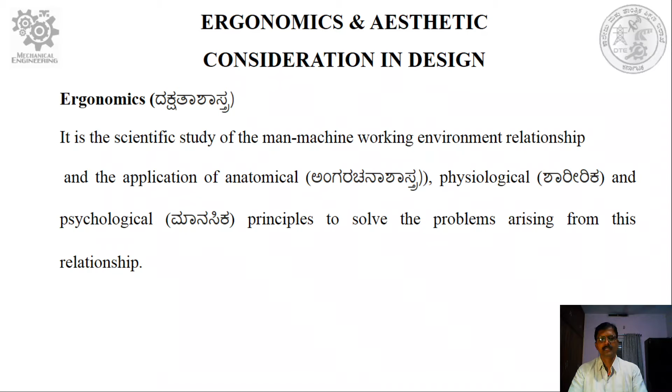Ergonomics. It is the scientific study of the man-machine-working environment relationship and the application of anatomical, physiological and psychological principles to solve the problems arising from this relationship. Aesthetic. A set of principles of appreciation of beauty. It deals with the appearance of the product at any stage in the product life. The aesthetic quality cannot be separated from the product.

Sometimes aesthetics is also called the judgment of sentiment and taste. Aesthetics examines our affective domain response to an object or phenomenon. Aesthetic judgments might be seen to be based on the senses, emotions, opinions, will, desire, culture, values, preferences, etc.

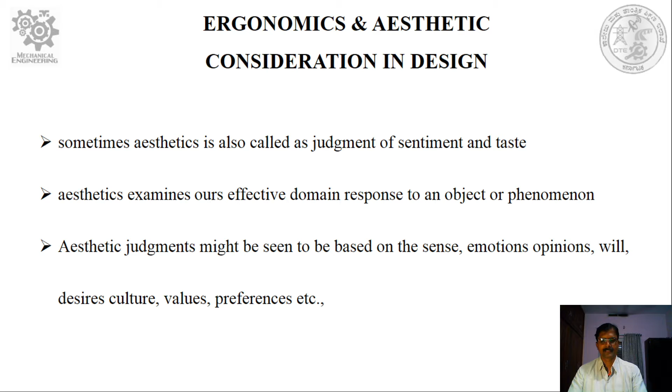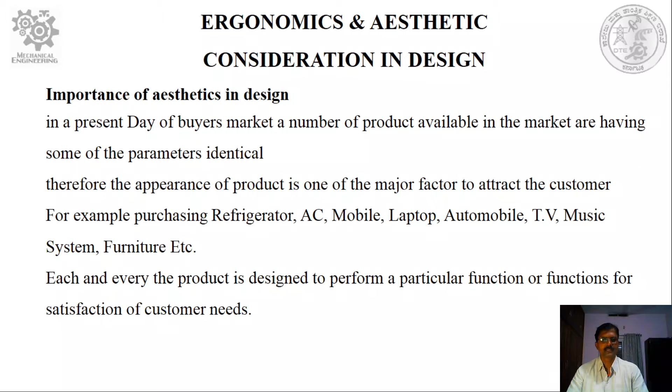Importance of aesthetics in design. In the present day buyers' market, a number of products available in the market have some of the parameters identical. Therefore, the appearance of the product is one of the major factors to attract the customer. For example, purchasing a refrigerator, AC, mobile, laptop, automobile, vehicles such as TVS, two-wheeler, four-wheeler, etc., TV, music system, furniture, etc. Each and every product is designed to perform a particular function or functions for satisfaction of customer needs.

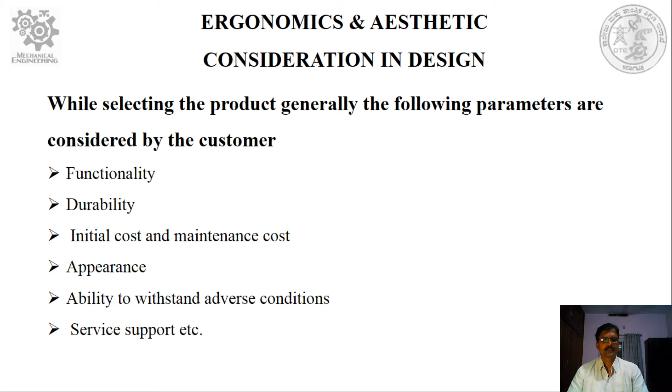While selecting the product, generally the following parameters are considered by the customer. First of all, functionality, durability, initial cost and maintenance cost, appearance, ability to withstand adverse conditions, service support, etc. Aesthetic considerations in design. The aesthetic considerations in design are as follows: step, taper, shear, streamline and sculpture. Let us see one by one.

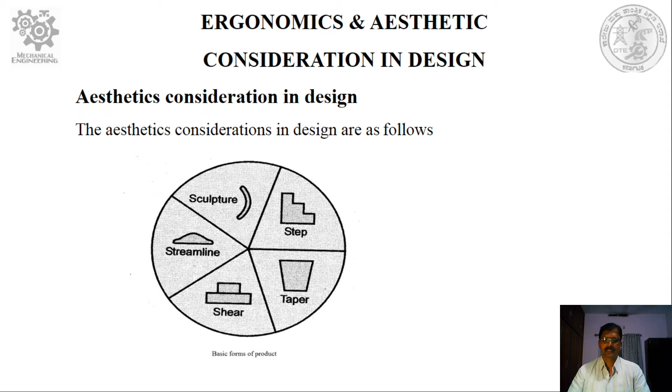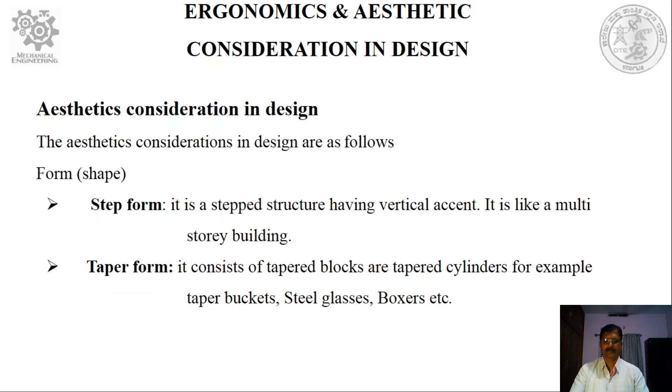Aesthetic considerations in design are as follows. Form or shape. Step form: it is a stepped structure having vertical accent. It is like a multi-story building. Taper form: it consists of tapered blocks or tapered cylinders, for example, taper buckets, steel glasses, boxes, etc. Shear form has a square outlook, for example, cartons, boxes, etc. Streamline form: it has a streamlined shape seen in modern cars, aeroplanes, etc. Sculpture form: it consists of ellipsoids, paraboloids and hyperboloids.

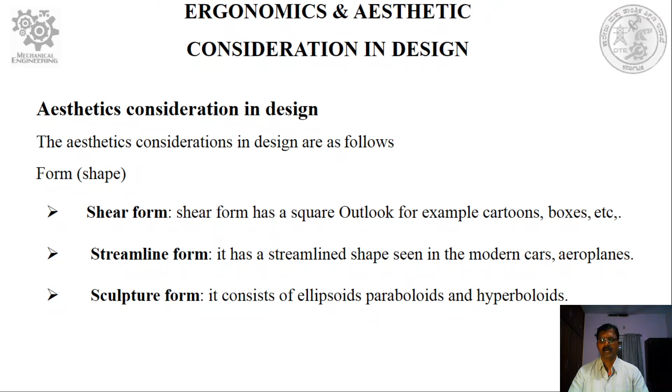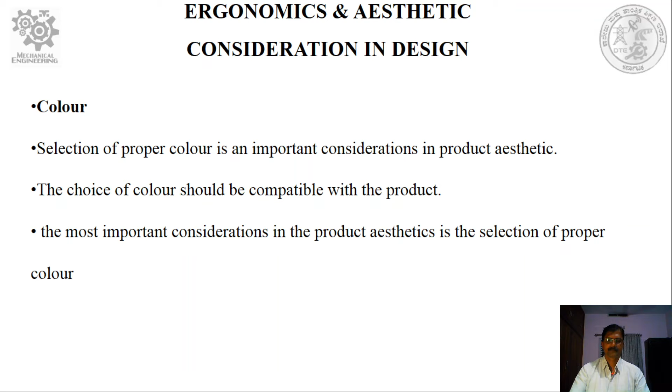Color. Selection of proper color is an important consideration in product aesthetics. The choice of color should be compatible with the product. The most important consideration in product aesthetics is the selection of proper color. The color choice should be compatible with the conventional ideas of the operator. Various colors are associated with different moods and conditions. For example, the selection of the color code should be compatible with the conventions.

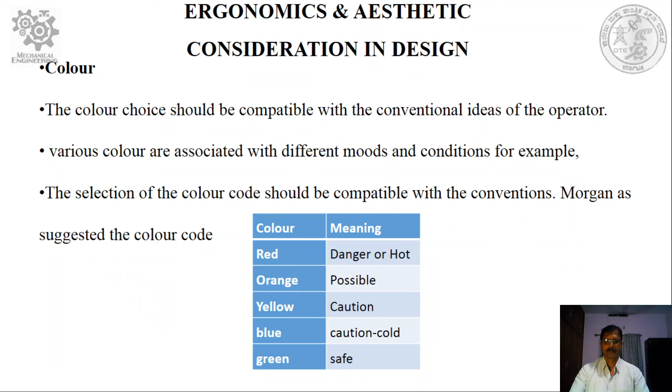Symmetry. The human eyes are conditioned to see things in symmetrical form and tend to reject asymmetrical shapes. Hence, in many products, symmetry about at least any one axis gives aesthetic appeal to the product. In some cases, functional requirement demands asymmetry. In that situation, balance in the product improves aesthetic feeling.

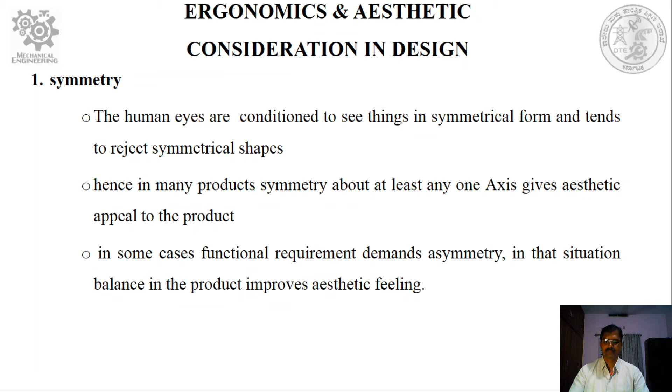Surface finish. The surface finish enhances the appearance of the product. The surface finish selected may be shiny, lustrous, or matte depending upon the requirement. Along with these parameters, external appearance is the cumulative effect of rigidity, resilience, motion of the elements, materials, manufacturing methods used, surface treatments used, etc. The industrial designer should consider all the above factors to meet the visual requirements of the product.

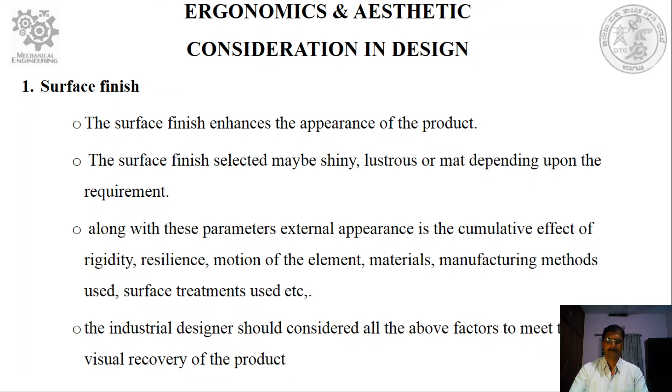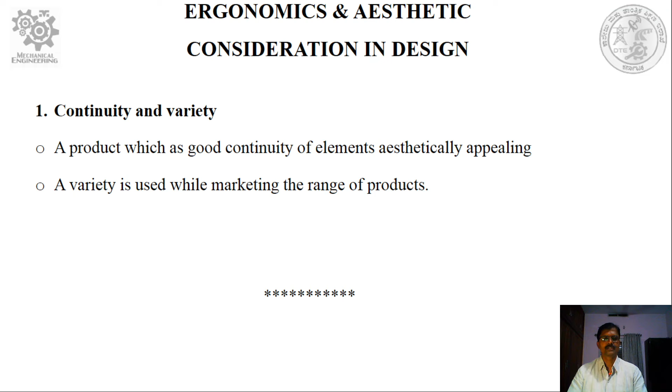Continuity and variety. A product which has good continuity of elements is aesthetically appealing. Variety is used while marketing a range of products. That's all regarding aesthetic considerations.

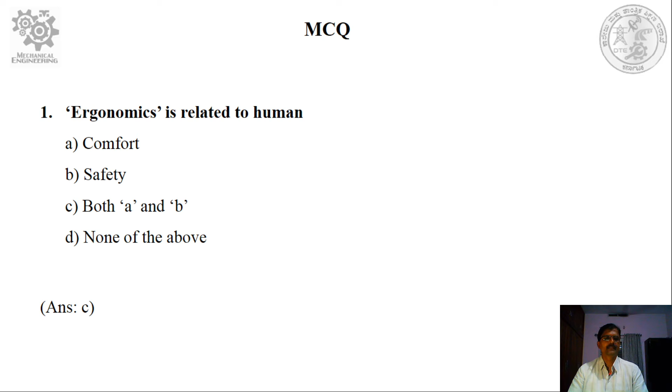Now let us move on to the assessment of this session, the multiple-choice questions. Let us start with the first one. Ergonomics is related to human dash. Here the choices are comfort, safety, both A and B, none of the above. The answer is both A and B, that is comfort and safety.

The quantitative information is one which concerns the: choices are the value of some variable, rate of change, condition or status of a system, presence or absence of some specific object. The quantitative information is one which concerns the value of some variables. Answer is A.

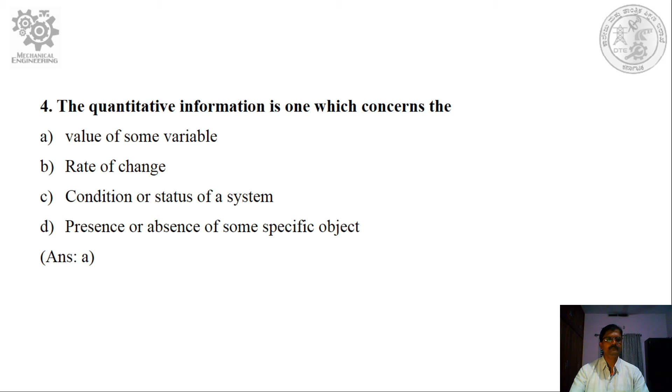Next question. Ergonomic principles suggest that monitoring displays should be placed outside peripheral limitations. Glow in the dark dials made of reflective substances are good for viewing at night. Visual systems should be preferred over auditory systems in noisy locations. All of the above. The correct answer is: ergonomic principles suggest that visual systems should be preferred over auditory systems in noisy locations.

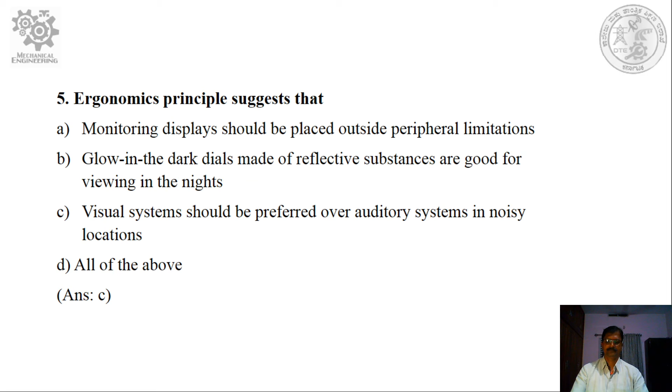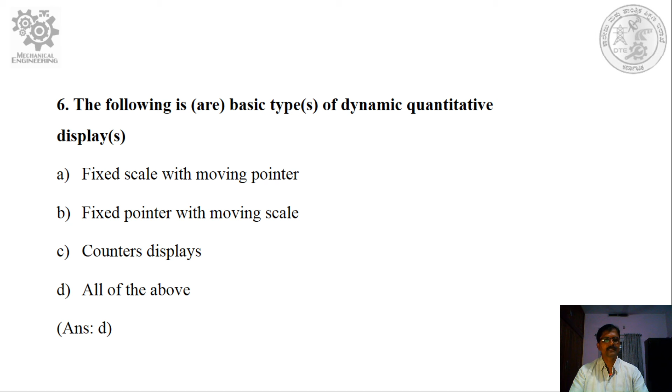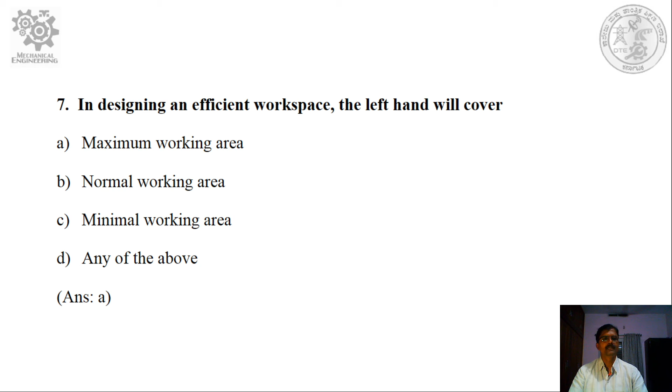In designing an efficient workspace, the left hand will cover: choices are maximum working area, normal working area, minimum working area, any of the above. Answer is maximum working area. Eighth question: the most frequently used components are arranged in left side, right side, central location, any of the above. The most frequently used components are arranged in a central location.

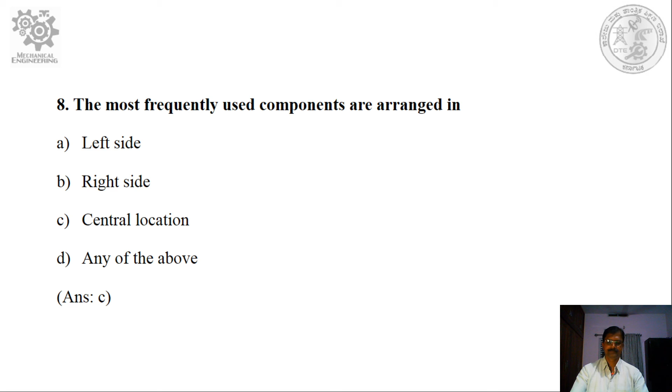The priorities when a large number of controls and displays are to be arranged are: first priority, primary visual task; second priority, primary controls; third priority, control-display relationships; fourth priority, location of frequently used items with easy use. Which of the above is not correctly matched? The D, fourth one: fourth priority, location of frequently used items with easy use.

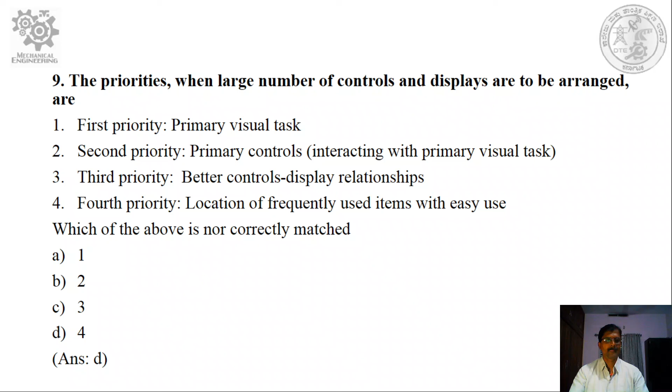Okay, thank you. To prepare this session, I used A Textbook of Machine Design by Khurmi, Shigley's Mechanical Engineering Design by Richard G. Budynas and Keith Nisbett, Design of Machine Elements by J. B. K. Das and P. L. Srinivasa Murthy, Design Data Handbook by K. Mahadevan and Dr. K. Balaveera Reddy, Fundamentals of Drawing by K. R. Gopalakrishna.